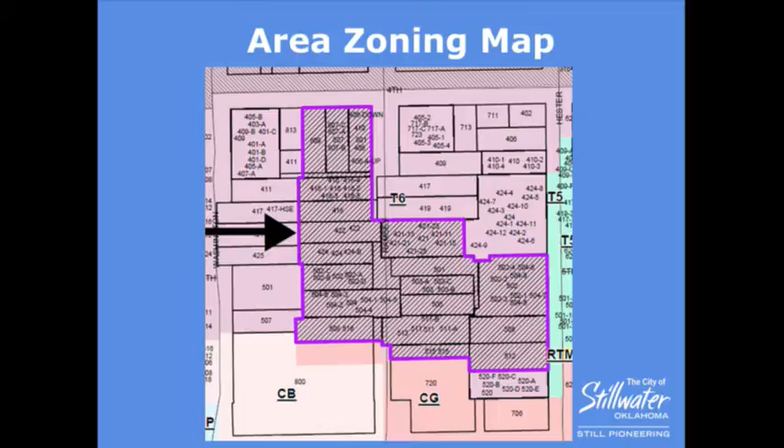I'm Mike Beatty, Development Review Manager. The property in question is the hatched area here in gray, surrounded by purple. It connects the south side of 4th Street, crosses Ramsey, and wraps around the south side of the Avid development that was approved some time ago and is currently under construction.

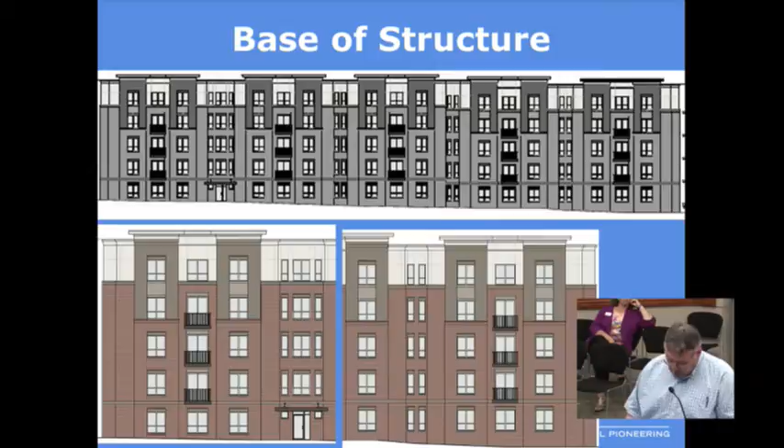Another elevation. Regarding the base of the structure, the base is to be a different element than the rest of the building. The expression line between the 1st and 2nd story is a required element, and you can see that in the elevation here. They've got a horizontal line between the 1st and 2nd floors, but the base is to be a minimum of 18 inches measured up from the ground. It's supposed to be a defined element. They don't propose that here. The base serves as a grounding element and is one of the elements used to enhance the pedestrian environment. They have the windows lined up, but that's not considered a base element unless you have alternate materials below that.

Besides the alternative compliance, there's a warrant request regarding awning materials. The code requires the awnings to be canvas, cloth, or polyester. They've proposed metal awnings over all the doors for a total of 12 awnings. There's an elevation based on the detail. They provided some example photographs of what the awnings would be like.

Findings: the development's in the T6 district. An alternative compliance and warrant are required. The alternative compliance deals with the 10-foot step back requirement at the 5th floor. What they proposed is a different material and color at the 5th floor, but no setback.

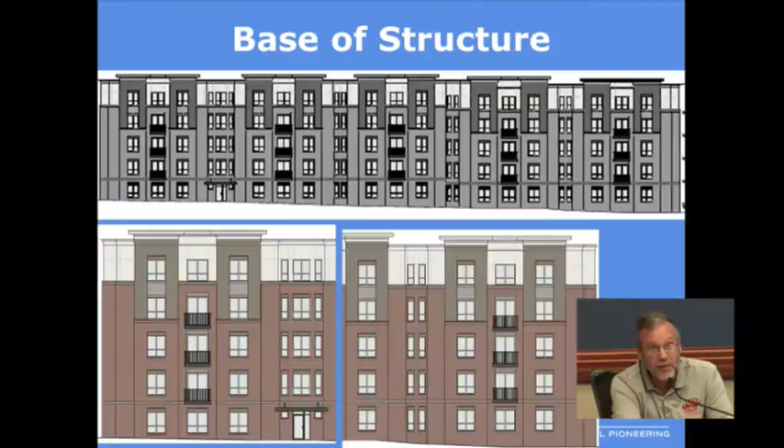Yes. The building insets, are they part of this requirement for that area? You're talking about that picture right there, yeah. I think the insets are very important in my mind for the architectural look, to have the function associated with pulling it back and having a pedestrian look at the bottom. So is that part of that one item? Well, the setback has to do with the height and not to create a tunnel. So obviously, that vertical face does break it up, but you still have the effect of the vertical tunnel, and it still is going straight up.

But if you go back to your item, it did not state that there'd be insets. When I read through this, that was my challenge, is that photo I like, but the requirement under that item did not say they'd have that, that the insets were not required. The vertical insets, yes. Yeah, they're not required. It's the step back at the 5th story that's required. Okay. But as an alternate, the insets could be required by this board? Yes, you can require it. Okay, thank you.

Okay? Do their elevations show those insets or not? It's hard to tell because they are flat. The rendering and the plans show it, but when you just look at it from the elevation, side to side, you can't see it. Right. And that's what's important to me, I think that offsets the effect of what we want on the 10-foot setback if we've got those insets at a certain distance apart.

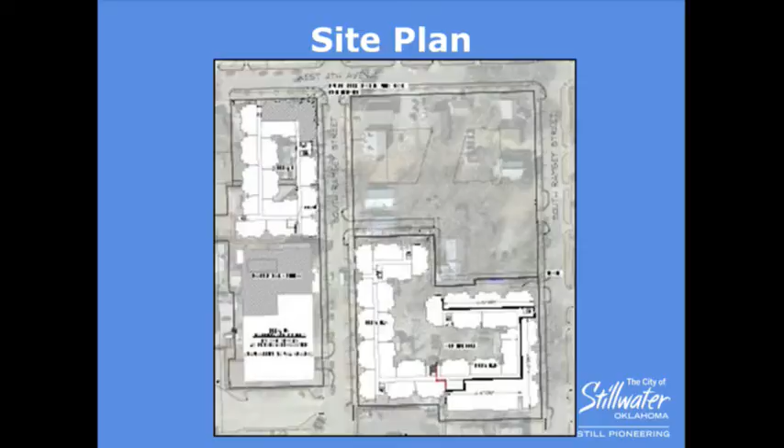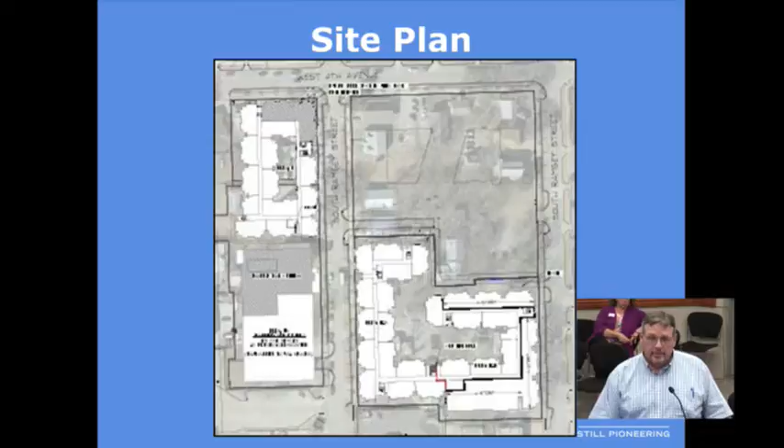You can see the relief in the footprints here on the site plan where they've stepped in quite a bit in some areas to break that vertical element up. Okay, and here you can see the 5th story has a different material. You have the vertical elements, you have the horizontal breakup line between the 1st and 2nd floor, but the issue of the base has not been addressed.

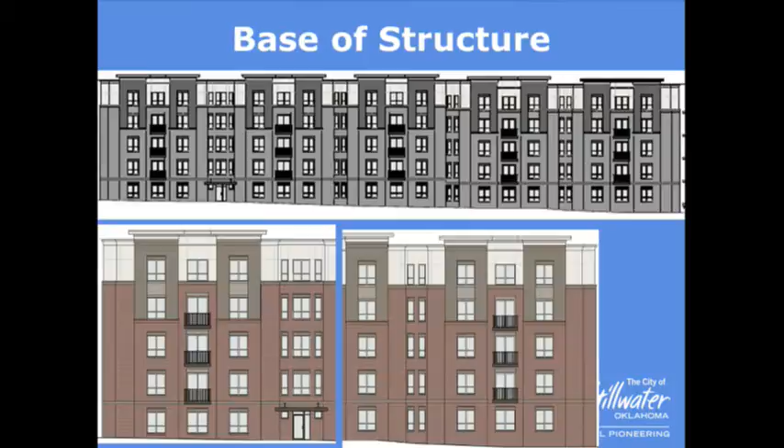Alternative compliance and a warrant are required. The 10-foot step back is one alternative compliance. The issue of the 18-inch base not being provided is another alternative compliance request. And then the warrant is the approval of the metal awnings as opposed to the material use. Means, methods, and materials for compliance were to be provided by the architect. There are representatives here from the client today. Do you have any more questions for me?

With that, we'll go ahead and open the public hearing. Anyone wishing to speak in favor of this item can step forward and state your name and address, please. Good afternoon. My name's Dave O'Black. I'm here representing the developer. Did you say I needed to state my address? Business address would be fine. I don't believe we have an address for the property yet, but it's at our development office at the corner of 4th and Ramsey. Our business address is in Columbia, Missouri at 4240 Phillips Farm Road.

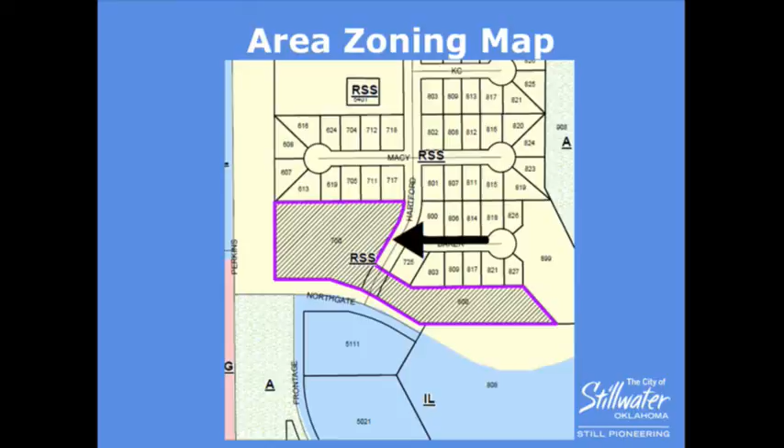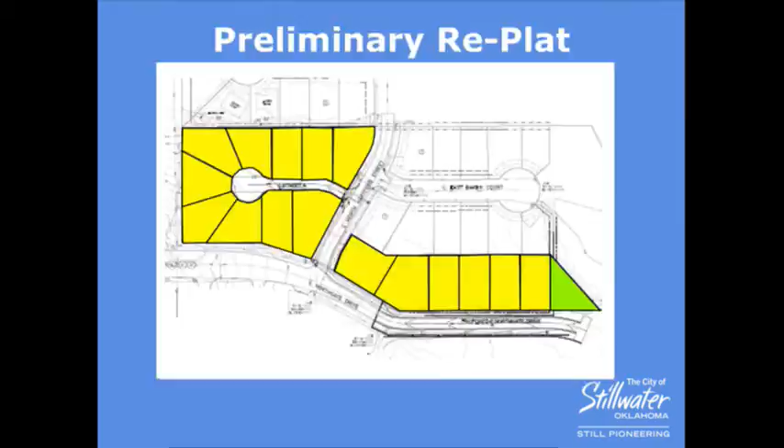Stormwater drainage: the preliminary plat with the original development proposed providing additional detention on the east side of the development, and then, through grading, allowing the portion to the west to go undetained, and they've accommodated that. The original plat anticipated commercial development; with single-family residential you've got a less dense impact, so the drainage is adequate. The lot square footage meets single-family requirements. The zoning is correct for the development. All of the public improvements, the road, water, sewer, modifications to the detention, are the developer's responsibility. They have submitted improvement plans, and they are under review.

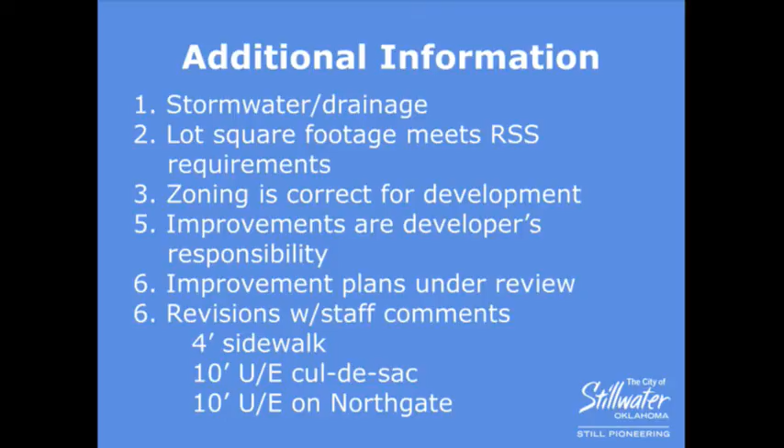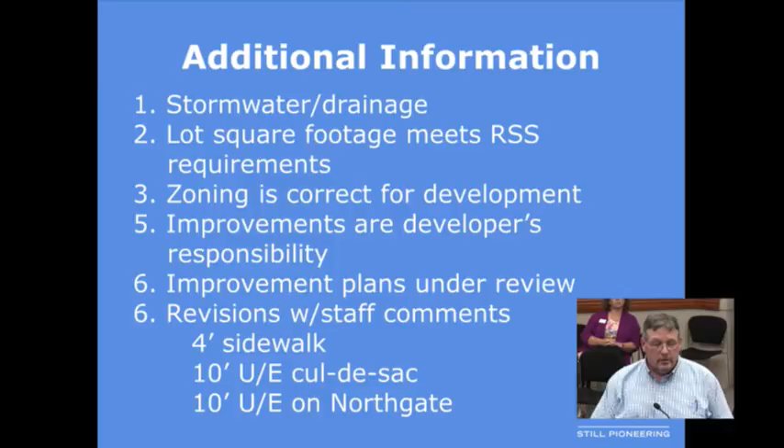Revisions with staff comments include the requirement for a 4-foot sidewalk along Northgate, and then a 10-foot utility easement along the cul-de-sac and on Northgate. We find that the proposed preliminary plat is compatible with the comprehensive plan of low-density residential development. It's consistent with all city codes with the addition of the comments that we listed. It will utilize public streets, sidewalks, and utilities. The existing zoning is correct for the replat. So far, we haven't received any revisions from the client. Any questions?

Is a 4-foot sidewalk the minimum required? In a residential area, yes. Okay. Yes. Any other questions? Thank you. With that, we'll go ahead and open the public hearing and ask for those wishing to speak in favor.

Good evening, Kelly Harris with Keystone Engineering, located at 923 South Lowry. I'm here representing the owners tonight. Mike did a really good job giving the overview for the project, but if you have any additional questions, I'm here to answer them. Questions for Kelly? Thank you. Anyone else wish to speak in favor of this item? Seeing none, anyone wish to speak in opposition of this item? Seeing none, we'll go ahead and close the public hearing and have staff's alternatives.